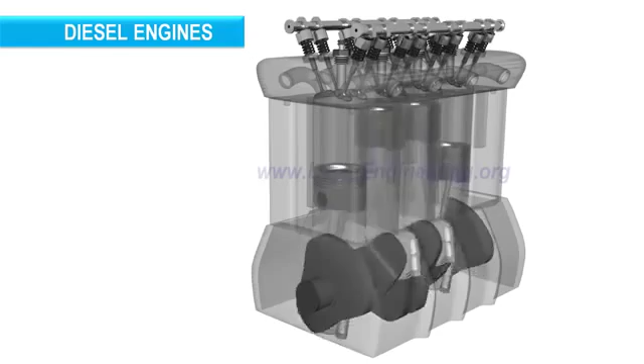An internal combustion engine transforms the chemical energy in fuel to mechanical energy. Diesel engines, which have been serving mankind for over a century, are the most versatile and economical IC engines. To release the chemical energy in diesel effectively, an atomized form of the fuel is made to contact with high temperature and high pressure air. This energy is effectively transferred as mechanical rotational energy.

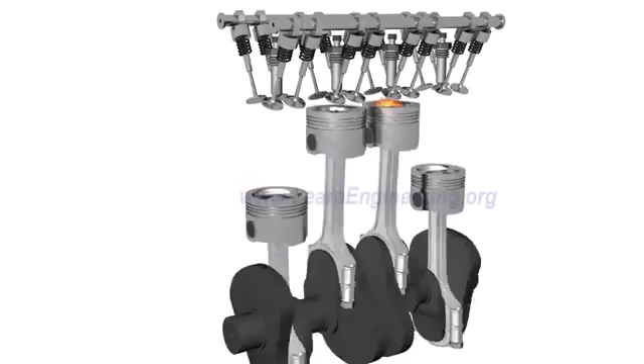So the operation of a diesel engine is all about producing high temperature and high pressure air continuously. We will see how this is achieved in this video.

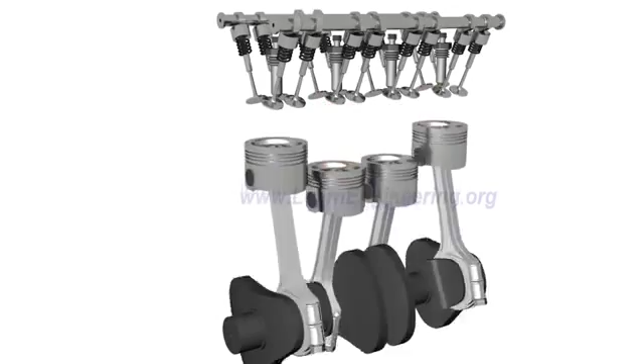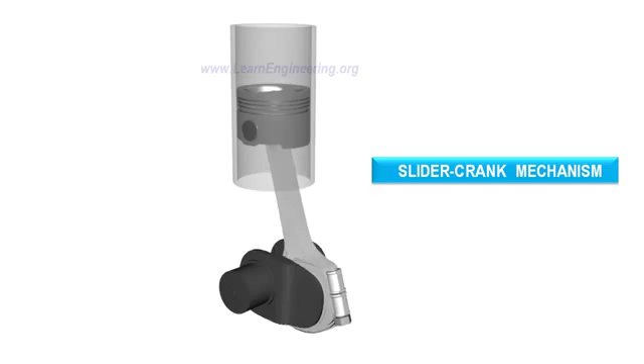Piston, connecting rod, crank, and cylinder form a mechanism called slider crank mechanism. Here, the linear motion of the piston is transformed to a rotary motion at the crank.

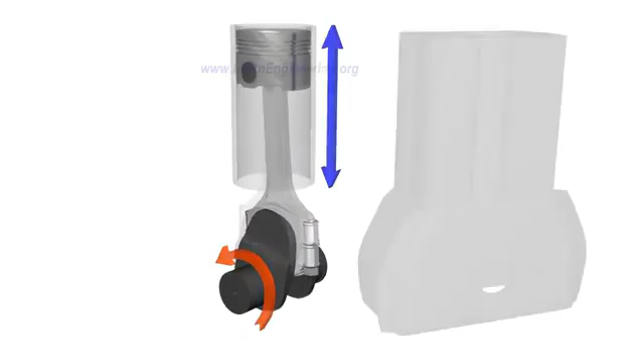In an IC engine, this mechanism is properly supported in an engine block. Cylinder head, valves, and fuel injector are fitted above the engine block.

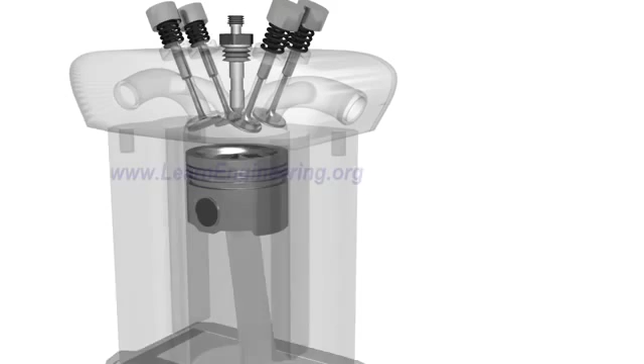When the piston moves downwards, inlet valves open and fresh air from outside is sucked in, or, in other words, the engine breathes.

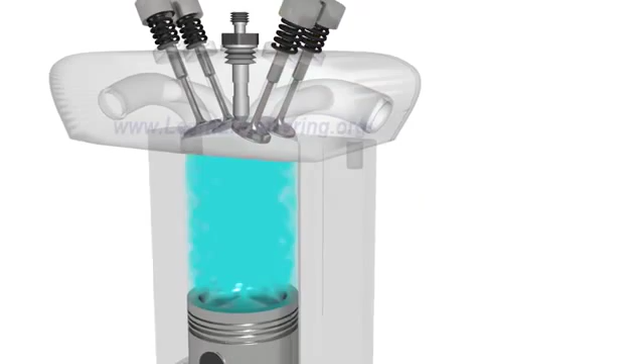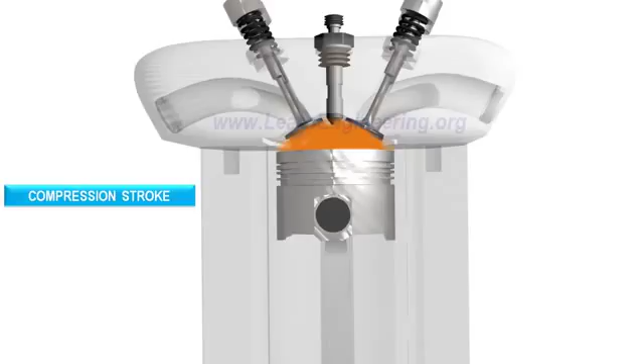During the return stroke, inlet and exhaust valves are closed, and the air inside the cylinder gets compressed. During the compression stroke, the piston does work on the air, so the temperature and pressure of the air will rise to a level which is higher than the self-ignition value of the diesel.

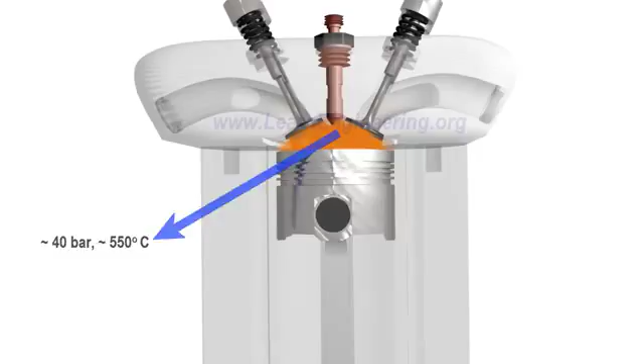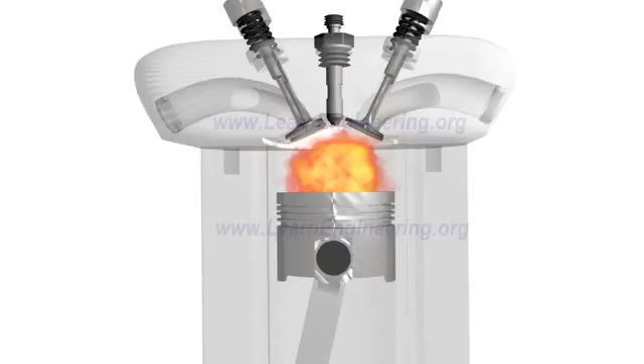An atomized form of diesel is injected into this compressed air. The fuel gets evaporated and undergoes an uncontrolled spontaneous explosion. As a result, the pressure and temperature rise to high-level values.

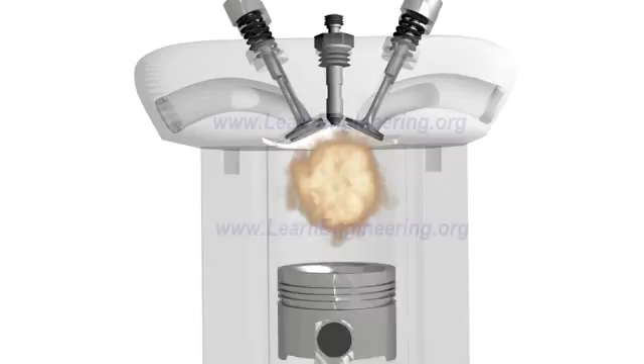The high-energy fluid pushes the piston downwards. The hot air does work on the piston, and energy in the fluid is converted to the mechanical energy of the piston. This is the only stroke where the piston absorbs power from the fluid.

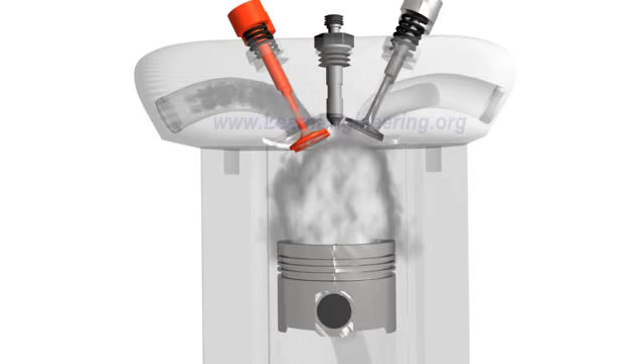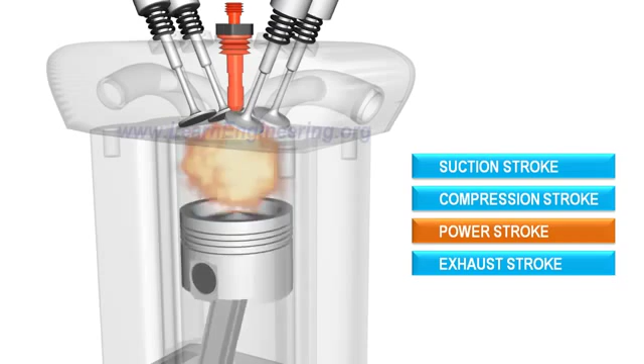Due to inertia of the system, the piston moves upwards again. This time, the exhaust valves open and the exhaust is rejected. Again, the suction stroke happens. This cycle, which has a total of 4 strokes, is repeated over and over for continuous power production.

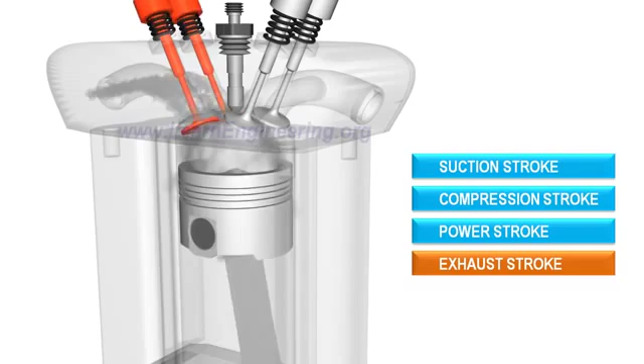You may have noticed that a bowl is provided on top of the diesel engine piston. During the compression stroke, this bowl helps produce air that is rapidly swirling. Thus, the injected fuel gets mixed with the air effectively.

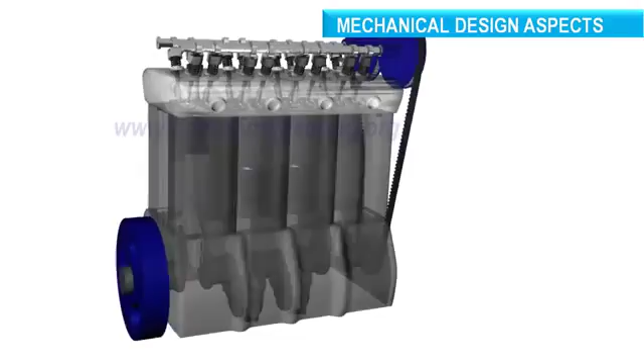The mechanical design of IC engines, particularly that of diesel engines, is a challenging and interesting task. Since the combustion process in diesel engines is never uniform and smooth, they are prone to more vibration and noise compared to petrol engines. Thus, diesel engines require a rugged structural design.

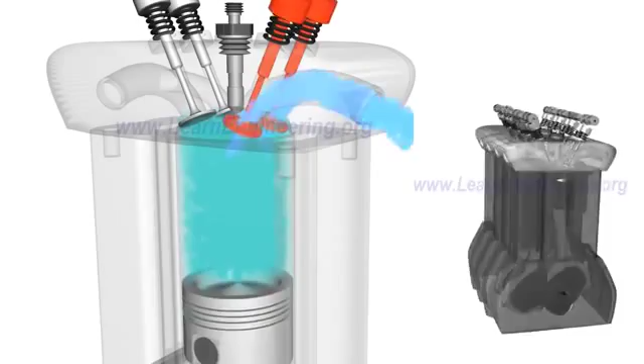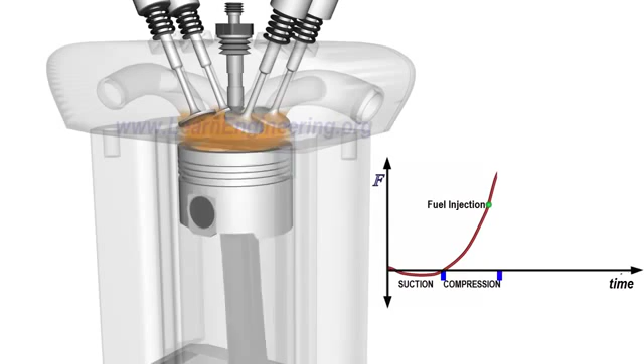Out of the 4 strokes, it is only during the power stroke that a tremendous amount of force is exerted on the piston. So a single-cylinder engine will always have high force non-uniformity as shown. Similarly, the output power will also have a fluctuating nature.

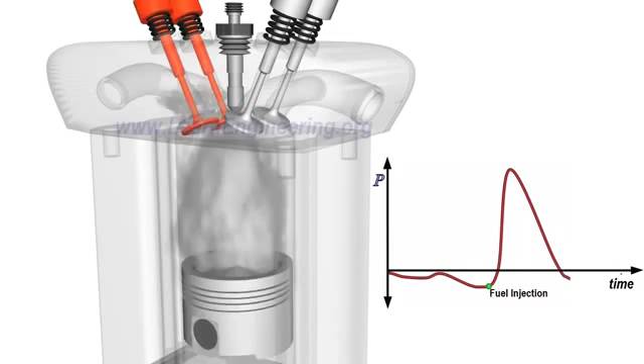But with more number of cylinders, one can overcome these problems. Consider this 4-cylinder engine.

Here, 4 different strokes can occur at a time. So the power stroke is always present in the engine. As a result, a 4-cylinder engine will have better force and power uniformity. In short, the more cylinders an engine has, the smoother it will operate.

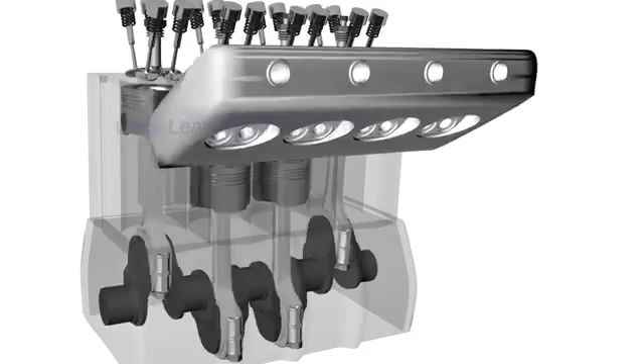A heavy flywheel, which acts like a power reservoir, further helps in smoothing out non-uniformity of power.

A huge unbalanced force arises in the form of dynamic unbalance due to the excessive mass at the connecting rod side. This is negated by providing counterweights on the crank side.

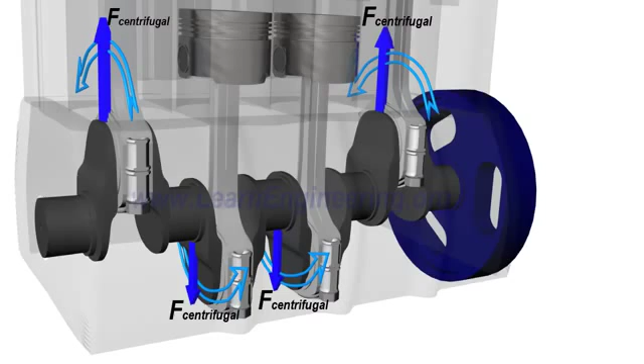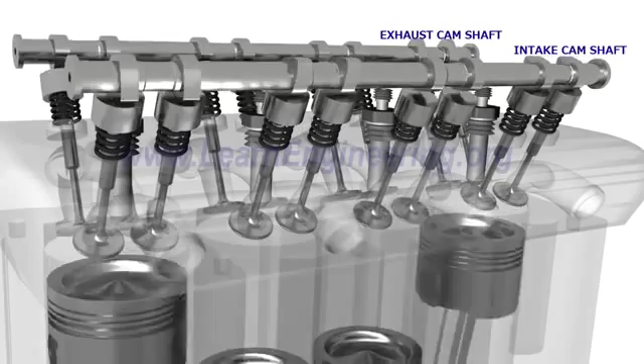Opening and closing of valves are accurately controlled by a pair of camshafts. Camshafts derive motion from the engine. It is clear that the camshafts need to rotate at half the speed of crankshaft.